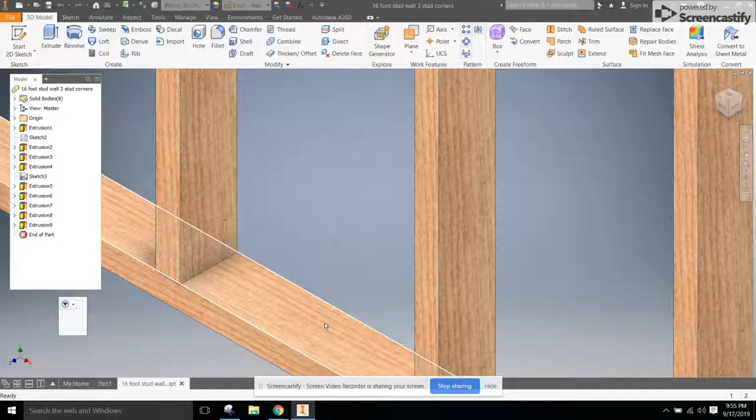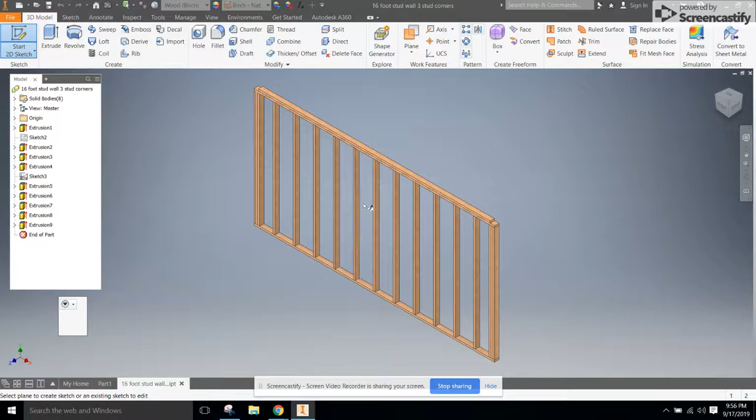Okay guys, welcome back. I'm going to go ahead and show you how to pop a window into a 16-foot wall here. My window specs call for a rough opening of 30.5 inches by 24 inches tall. So I'm going to start by cutting out a hole. The hole's going to be a little bit larger than that on the vertical axis to account for the sill plate and header.

I'm going to put in a rectangle, and this rectangle is going to be 30.5 inches wide. So the width is true, but the height, which is 24 inches, is going to get an additional 7 inches. And that 7 inches is 1.5 inches for the sill plate and 5.5 inches for the 2x6 header. So 24 plus 7 is 31. And it's going to go there.

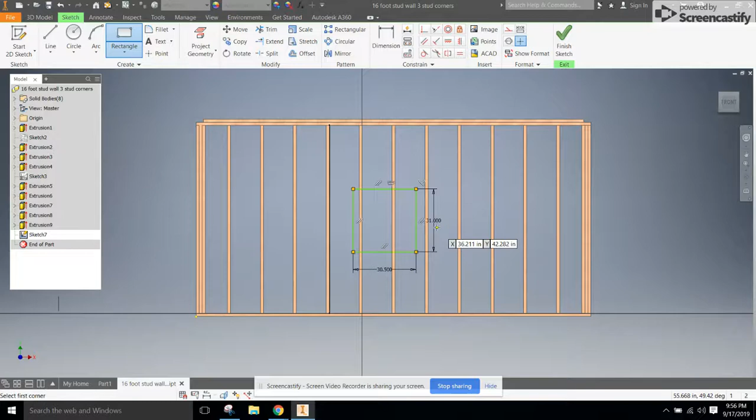I'll dimension this off the ground. I want it to be 4.5 feet to the bottom of the rough opening, which would be 54 inches minus the 1.5 inches that will be the sill plate. You'll see here in a little bit. I'm going to dimension from the left edge to this. I want it to be centered.

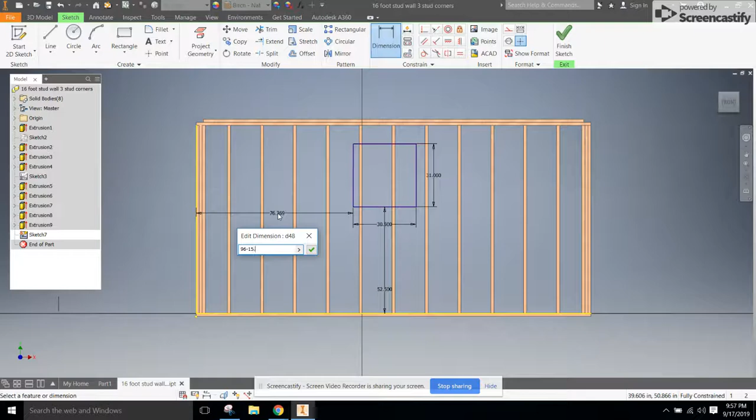So half of the wall is 8 feet. And I want that to line up with the center of the window, which is 15.25 inches from the left edge of the window. So that would be, let's see, 96 inches minus that half, which is 15.25. I'll hit enter, and you'll see that 30.5 is pretty nice because it lines up the edge of my rough opening right on the studs, so I won't have to add king studs. That'll be a helpful thing, a little bit of a shortcut.

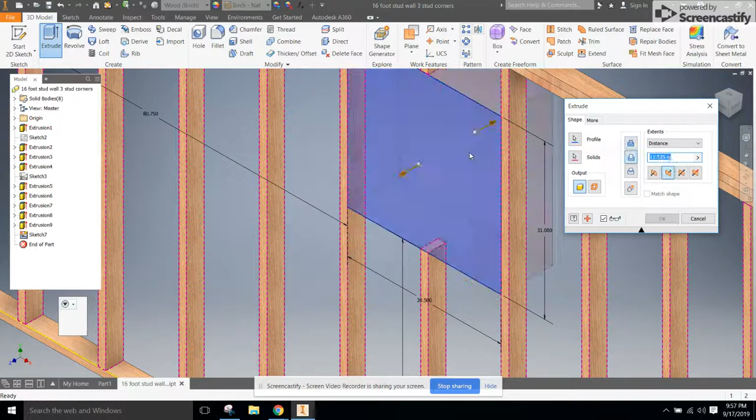I'm going to go ahead and extrude this drawing as a cut. I could have hit cut, or I could just drag it through like that, and you can see I've cut an opening a little bit bigger than I needed. I'm going to go ahead and add some elements here. I'm going to draw on this face. I'm going to draw a rectangle.

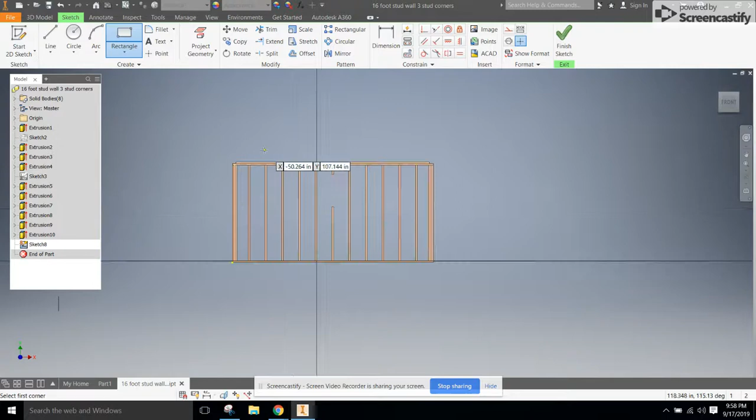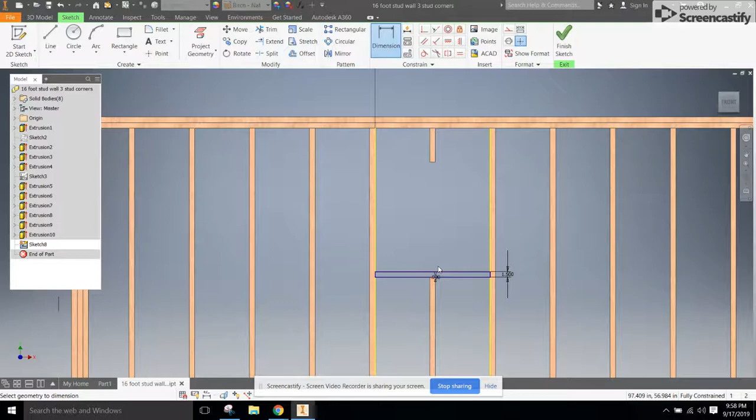Always goes back. It's always kind of funny how that works, but I'm going to go here, and I'm going to go 30.5. I'll hit tab and 1.5. So that'll go there, and then I'll dimension that to the top of what is now going to be a jack stud or a cripple stud. I'll finish the sketch and extrude that. I'm being sure to hit solid.

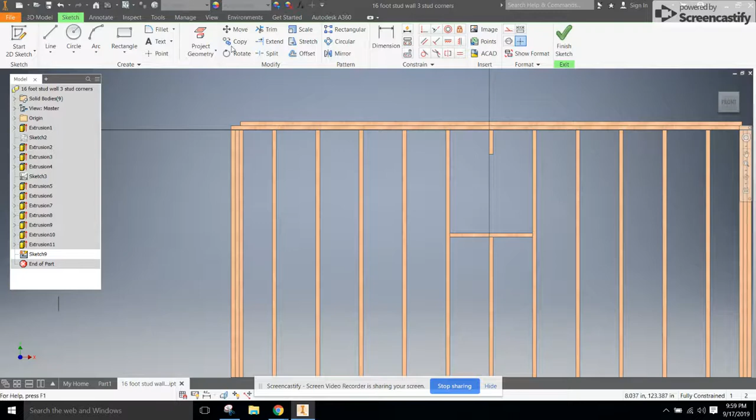Go to a little bit of an isometric view, and I'll go the other way, and I'll go 3.5 inches with that. So you can see that creates a nice sill plate there for my rough opening. It's supported by this, well, it's a cripple stud now, but it was a stud. I'm going to go ahead and add my 2x6 headers. So I'll draw there on that face. Put a rectangle in there, and that rectangle will go from here to here. 30.5 and 5.5, which is a 2x6. I'll hit enter. I'll dimension that up to meet the bottom of that cripple stud.

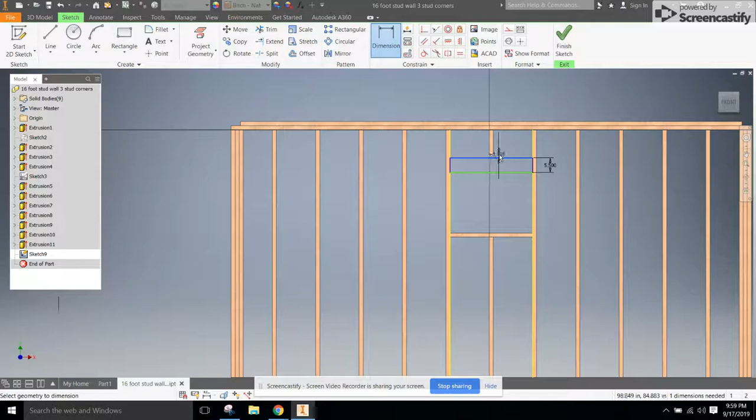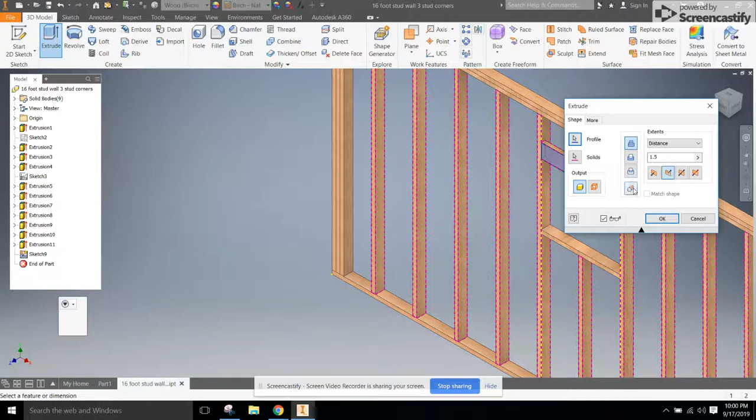Again, it's kind of a funny verbiage that we use with building. I'll go in, and that'll go in 1.5 because that's a 2x6 laid on its side. Whoops, I accidentally forgot to make that a new solid. So I'll click new solid and hit OK. You can see that does a little bit better job now. This is 1.5 inches, and the thickness of that is 3.5 inches. 1.5 times 2 is only 3.

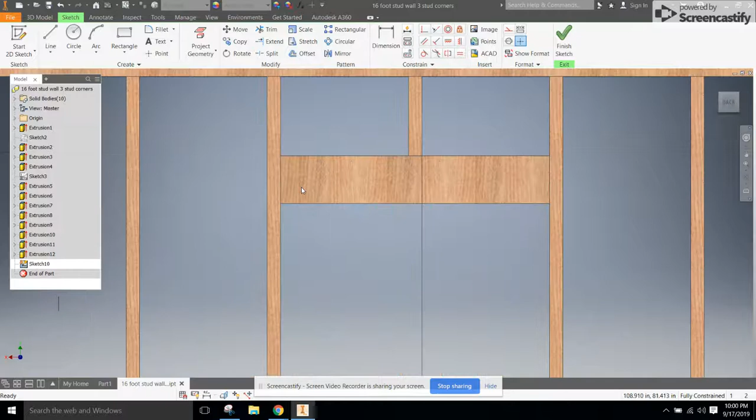So traditionally what is done is in between there, we add a 1/2 inch piece of plywood. That way it's nice and flush on both sides as far as a nailing surface for both drywallers and somebody that was sheeting a house. So I'm going to go ahead and draw a rectangle in here.

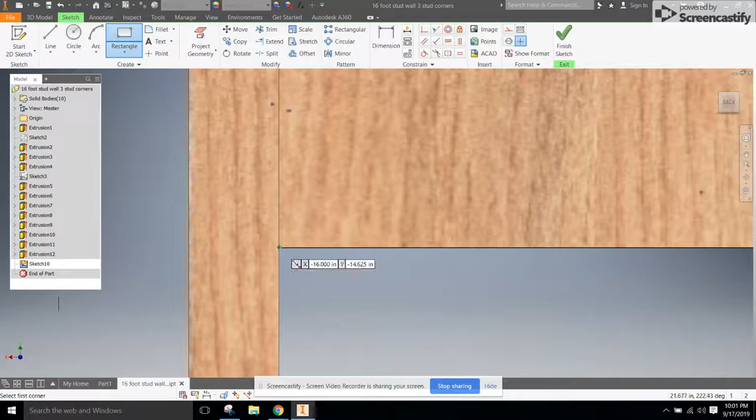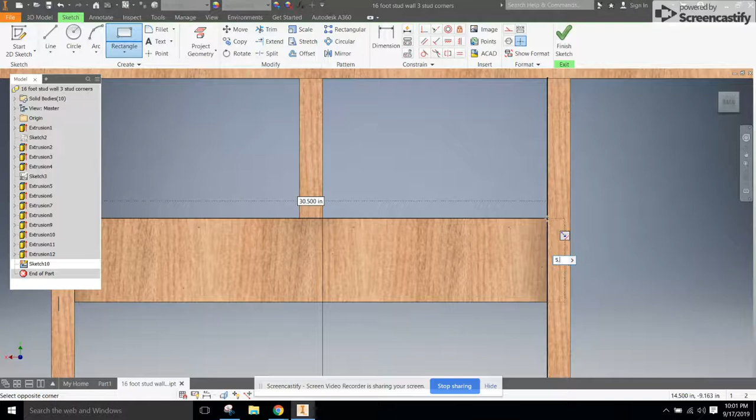And let's see, trouble picking up my edge there. Not 100% sure mathematically what that should be, so I'll project my geometry to help me lock on here. It's a strange fraction. Sometimes that happens, and again, that's why we measure things. But I better just tab across and hit 5.5 so that I'm safe. I'll finish that sketch, and I'll extrude that a 1/2 inch.

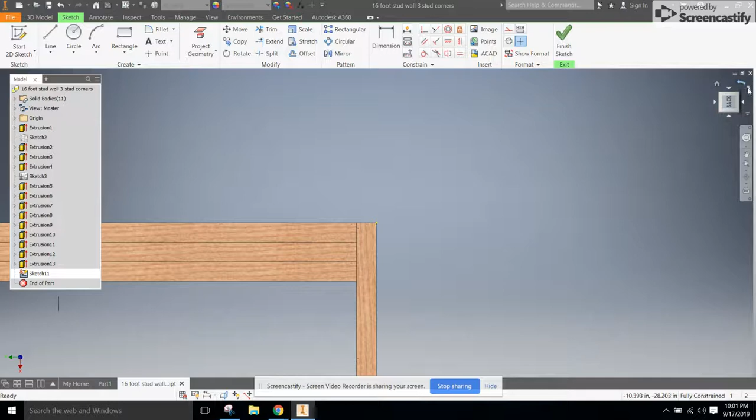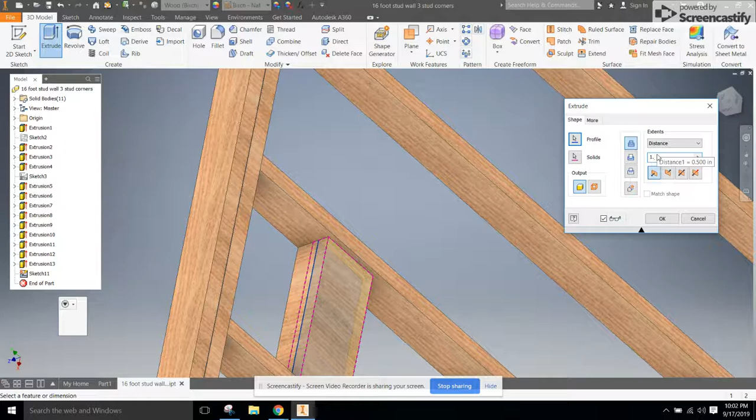So 0.5, enter. Oops. Naturally didn't create it as a new solid, so it doesn't give me quite the look I want. There it is. And then I'm going to sketch one more time. Kind of throwing me around in a funny way. I'll project my geometry, then go hit my rectangle, and come down here, and there it is. Finish my sketch, and I'll extrude that 1.5 inches for the other 2x. I'll be sure to hit new solid this time, and let's take a look at what I got. So my rough opening's good.

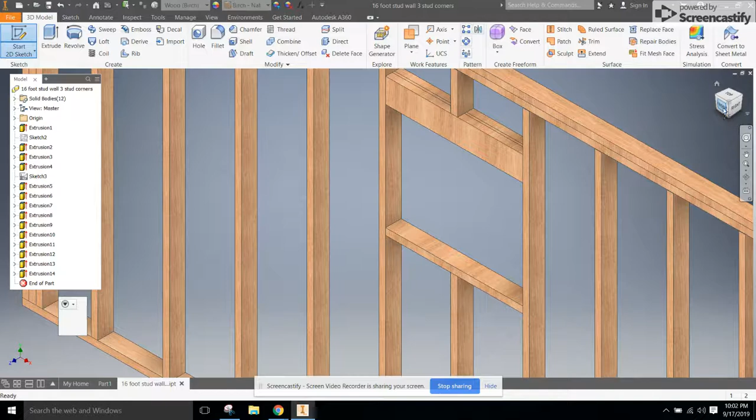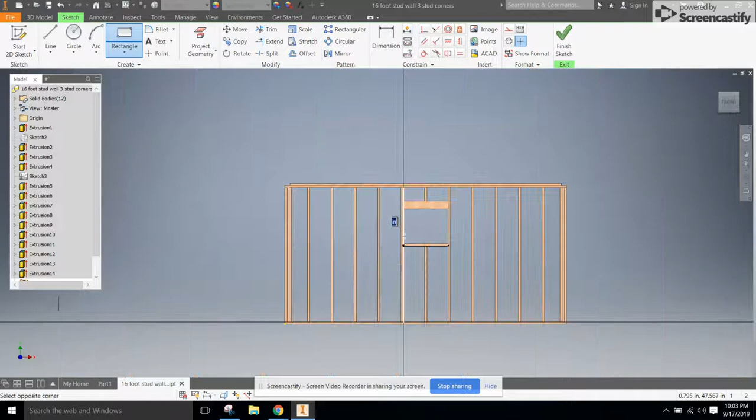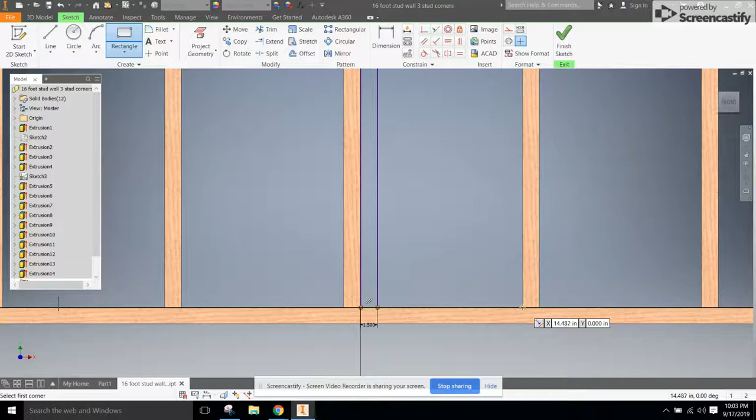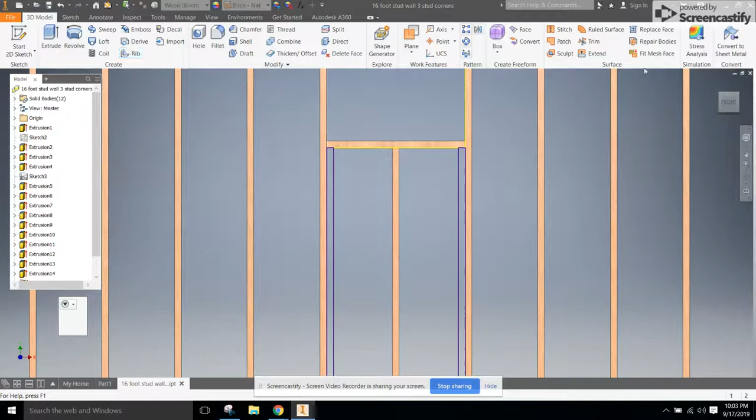Now these are unsupported, so I'm going to have to add some jack studs here for this. To do that, the easiest way is going to be to sketch from the front and extrude in. I'll do that here. Now I'm going to go ahead and sketch on here the cross section of a stud there, and I'll drag that down to here, and that'll be 1.5 inches, 52.5. I'll go ahead and put one, I suppose, right here. At this point, and come down here, make that 1.5, enter. I'll finish my sketch, and then I think you'll be able to see this as I extrude these.

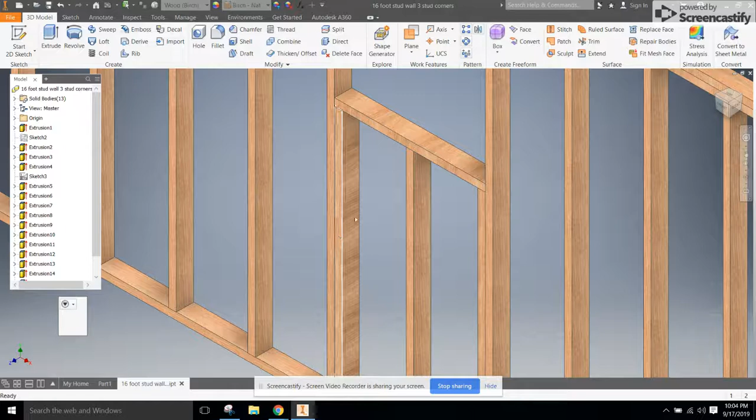I'll extrude this one and this one, and I will go in 3.5, and I'll hit new solid, which will add those jack studs, and they support that sill plate there. I'm then going to add a jack stud from the sill plate up to here. I do that with wooden frame windows.

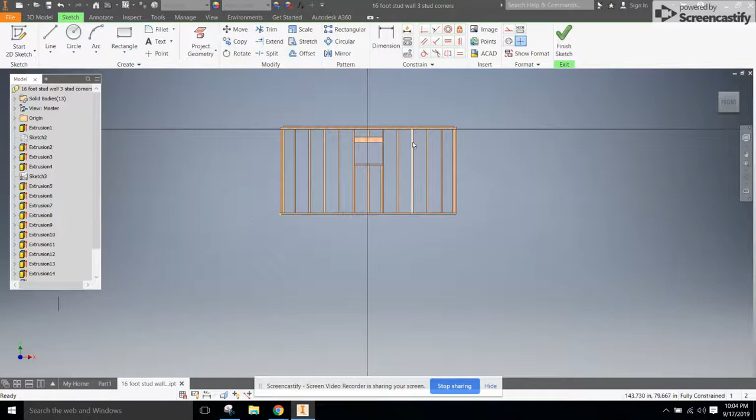This would be perhaps controversial to some builders, who would decide to scream and shout at me for this. They would rather not have this jack stud that supports this header sit on top of that sill plate, but run all the way continuous from the floor. I'm going to risk it because I don't think anybody's going to put me in Autodesk Inventor jail, but I do acknowledge that some builders would have an issue with that.

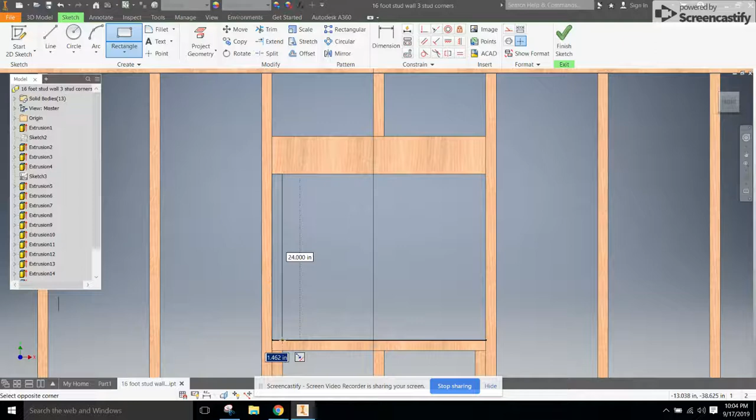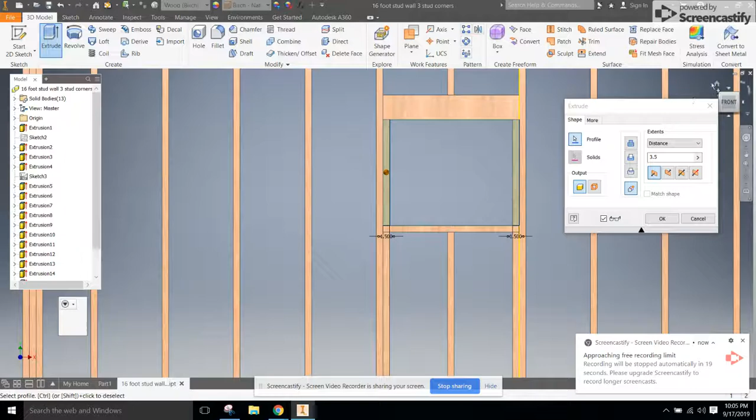I'll make this 1.5, enter, and I'm going to draw one down from this corner. That is 1.5, enter, and I'm going to go ahead and finish the sketch. I'll extrude these, and I'll go up here, extrude them inwards, and that, children, is how we frame a window. Again, there's an argument to be made that these could be run continuous from the floor plate, but thank you.